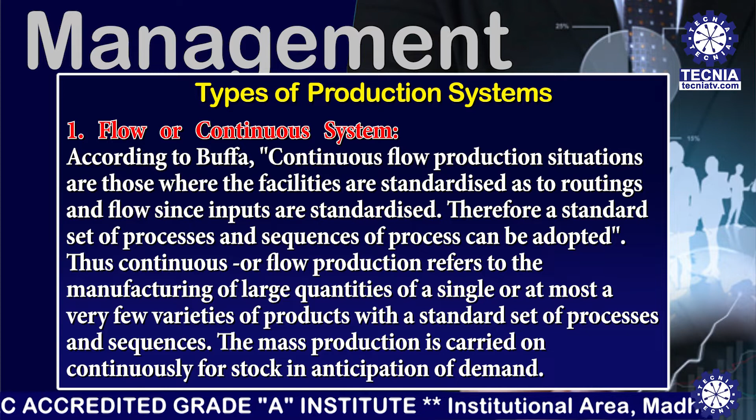In this lecture, we will discuss the concept of production system and its various types. There are many types of production system. The first one is flow or continuous system. According to Buffa, continuous flow production situations are those where the facilities are standardized as the routings and flow since inputs are standardized. Therefore, a standard set of processes and sequence of processes can be adopted.

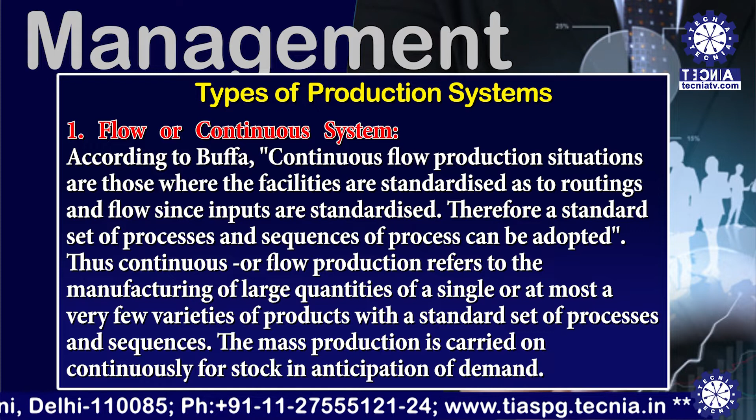So, continuous or flow production refers to the manufacturing of large quantities of a single or at the most a very few varieties of products with a standard set of processes and sequence. The mass production is carried on continuously for stock in anticipation of demand. Continuous production is also of various types.

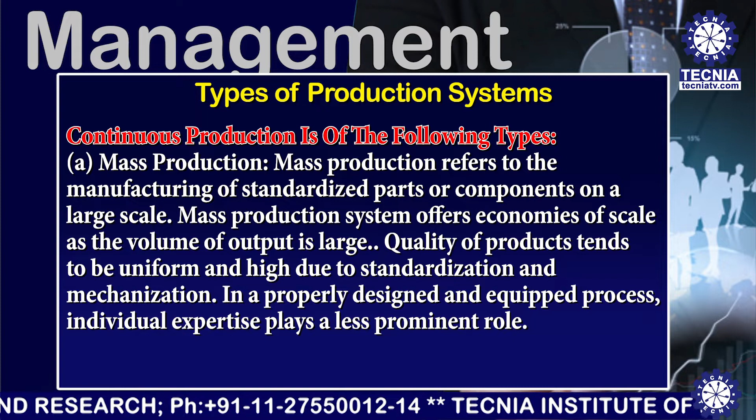The first one is mass production. Mass production refers to the manufacturing of standardized parts or components on a large scale. Mass production system offers economies of scale as the volume of output is very large. Quality of products tends to be uniform and high due to standardization and mechanization. In a properly designed and equipped process, individual expertise plays a less prominent role.

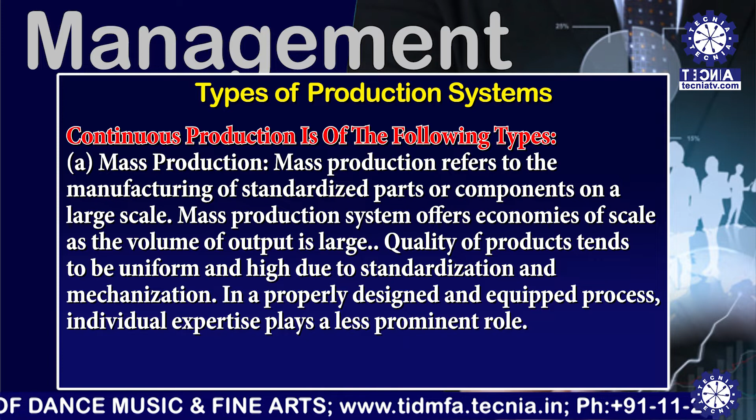The second type of production system is process production, which is part of the continuous production system. Production is carried on continuously through a uniform and standardized sequence of operations. Highly sophisticated and automatic machines are used. Process production is employed in bulk processing of certain materials.

The typical processing industries are fertilizer plants, petrochemicals, and milk dairies, which have highly automated systems. They are not labor intensive and the worker is just an operator to monitor the system and take corrective steps if required. Next, the third type of continuous production system is assembly lines.

Assembly line is a type of flow production which was developed in the automobile industry in the USA. A manufacturing unit prefers to develop and employ an assembly line because it helps to improve the efficiency of production. In an assembly line, each machine must directly receive material from the previous machine and pass it directly to the next machine.

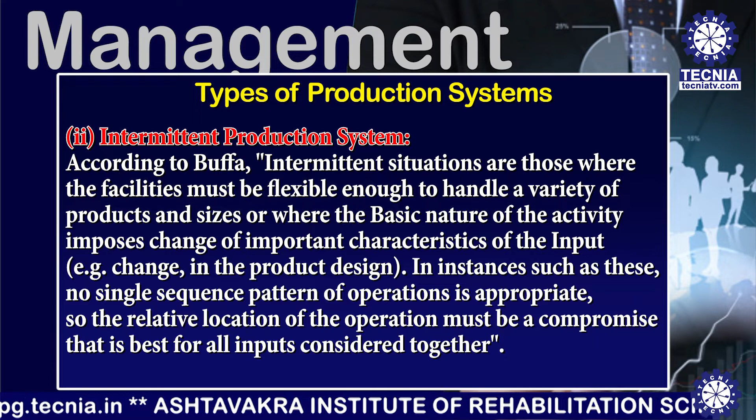Machines and equipment should be arranged in such a manner that every operator has free and safe access to each machine. Space should be provided for free movement of forklifts, trucks, etc., which deliver materials and collect finished products. Next, the second type of production system is intermittent production system.

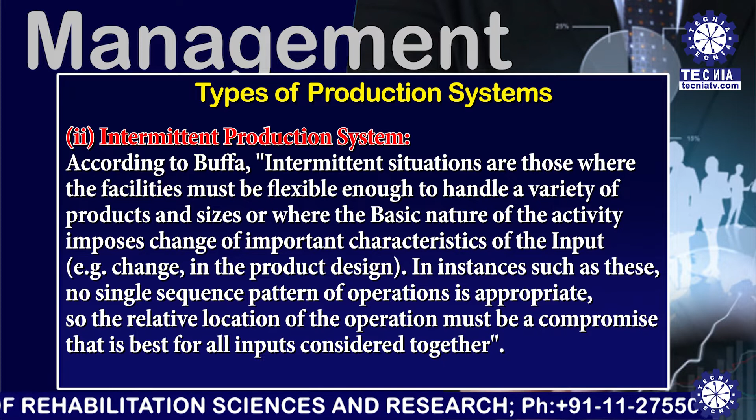According to Buffa, intermittent situations are those where the facilities must be flexible enough to handle a variety of products and sizes or where the basic nature of activity imposes change of important characteristics of input. For example, change in the product design. In such kind of activities, no single sequence pattern of operation is appropriate. So, the relative location of the operations must be a compromise that is best for all inputs considered together.

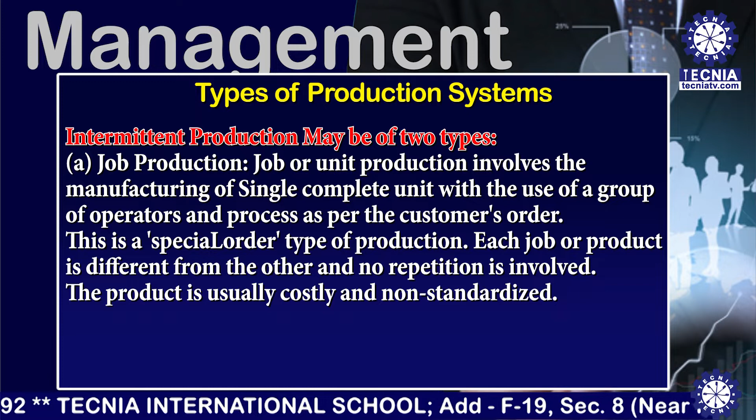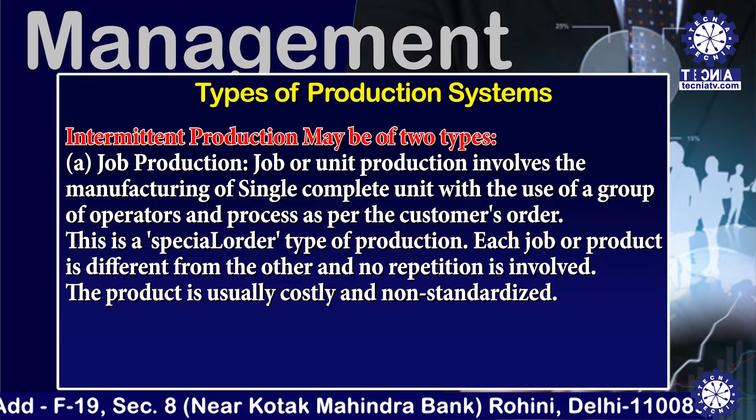There are also two types of intermittent production system. The first one is job production. Job or unit production involves the manufacturing of a single complete unit with the use of a group of operators and processes as per the customer's order. This is also known as special order production. Each job or product is different from the other and no repetition is involved in this process.

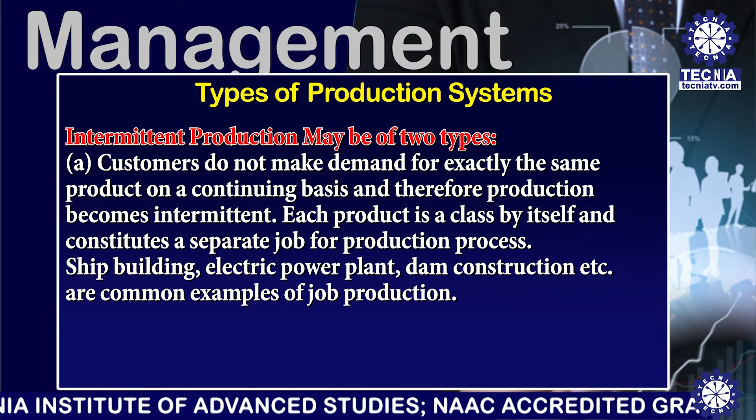The product is usually costly and non-standardized. Customers don't demand exactly the same product on a continuing basis, and therefore production becomes intermittent. Each product is a class by itself and constitutes a separate job for the production process. Shipbuilding, electric power plants, dam construction, etc. are common examples of job production.

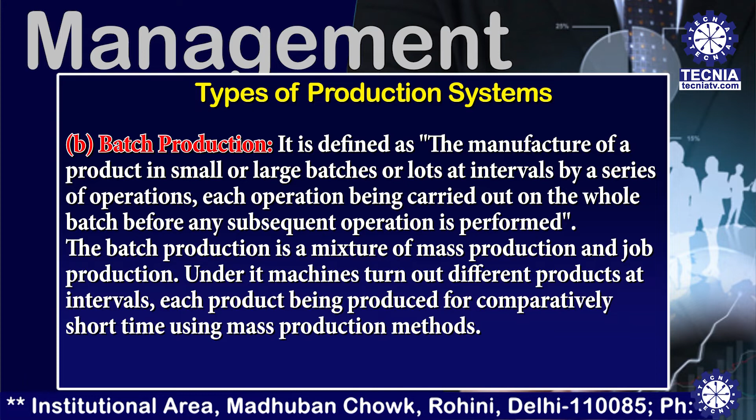Next, the second type of intermittent production system is batch production. It has been defined as the manufacture of a product in small or large batches or lots at intervals by a series of operations, each operation being carried out on the whole batch before any subsequent operation is performed. Batch production is a mixture of mass production and job production. Under it, machines turn out different products at intervals, each product being produced for a comparatively short time using mass production methods.